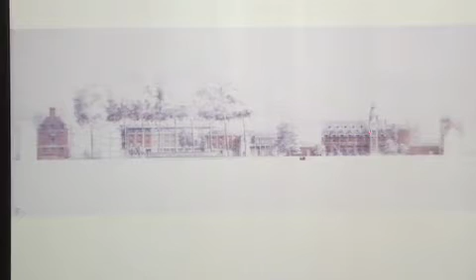So this is just one of the drawings from that master plan, which is a crayon drawing, and it shows a sort of length cut through the college. We're just beyond Wren's first building. So Christopher Wren built the chapel, and then we get a Waterhouse library, and Waterhouse wanted to pull down Christopher Wren's building because he thought it wasn't terribly good, and he wanted to make the tallest kind of campanile in Cambridge. And then you've got Scott, and other architects working around the edge of the site. And the intervention here was one about height, 1, 2, 3, 4 stories there, a new master's lodge, principal's lodge. And the question was, is it brick or is it stone? I know that sounds...

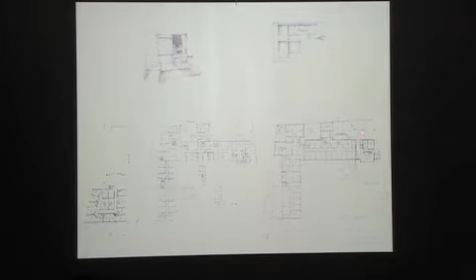This is the interior. Those are those wonderful plane trees you just saw in that image. So these were just the first drawings of a layout which showed sort of secondary courts. So we're sitting back between trees that had to be kept and creating smaller court spaces, and then a series of intimate spaces and the bigger space and so on. The point I make is, whilst beginning to formulate a configuration for a building, a complex building with lots of parts to it, at the same time one's thinking about materials.

And what I'd like to say is that, you know, the punt that you make as a designer at certain points, it's that intuition which is incredibly important for the project. And the planning is one thing, but the punt about a sense of what the materiality will be is the beginning of a long journey. It's like a novelist, I guess, sketching out a novel and then filling it out. So it's a very potent thing.

These were 2 little sketches. I'm sorry they're kind of quiet, but you know, what I wanted to do was, in each of these rooms, which are student rooms, to have 2 windows. And this is the first sketch of a stone manifestation of the 2 windows, where I wanted to make a big lintel of stone that spanned 3 meters, 3.3 meters or something like that. You get a big window and a small window. The small window has a kind of shutter in it. There's a bookcase, and then there's the big window that goes right to the floor to give light in.

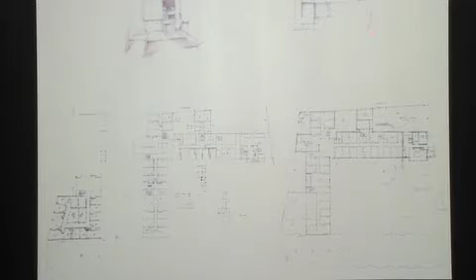And, you know, I'll come to describe this a bit more, but that sketch, actually, which shows the idea of a recess that would hold the 2 windows, becomes a journey in terms of making that is lengthy and very, very interesting. And it was the first time, actually, that I started a dialogue with Arups, who are our engineers, and a wonderful guy called Turlough O'Brien, who was their research guy on materials. And now they have a group called Arup Facade Engineers, and I've worked on most of my projects with those guys in terms of creating the detail, going through the specification, making sure that, you know, liabilities are covered, and so on and so forth.

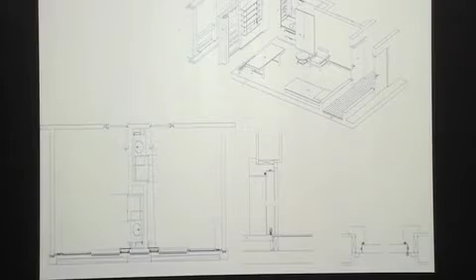But it is therefore a room, this is a typical student room, which has just got a nice big heavy door frame on the outside and no bead to the inside, in order that the bed can be this direction or the other direction. It sounds simple, but it's just to give that flexibility. It's an absolute dimensional kind of fix. You've got the big window and the small window. You've got layers. So you've got the stone on the outside, then you've got the interior with a place to bunch a curtain,

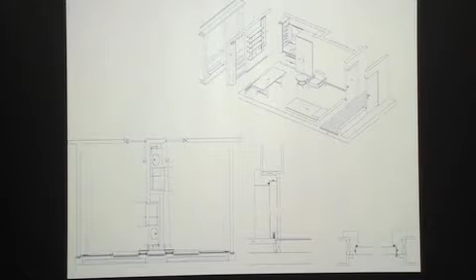which is actually in the position that water is, there's a downpipe here, so that water is pulled through the facade because there are secret gutters here. You can see that sort of strange diagonal. That's a fall on a metal gutter. And if I take you back to that building now, it's weathered very beautifully because of that detail. The secret gutter in the recess. So what was the recess in the sketch becomes a clear manifestation of a rhythm of thicker bits of wall and thinner bits of wall.

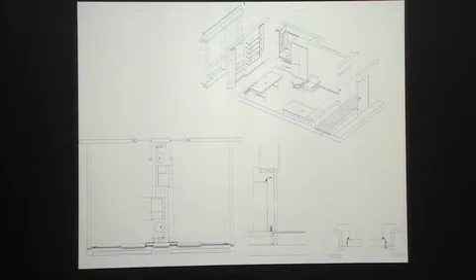The thicker bit takes a wash basin and clothes storage, and then reverses to the other side for a room. So you get a kind of back-to-back spine, thicker wall, recess, 3 meter or 3.3 meter, if I remember correctly, lintel, and back. So this is the detail for that planning of the big jamb, little architrave, you know, that allows that flexibility. There's the niche for the cleaning. There's a little wooden shutter that closes the little window and a curtain that closes the other one, and in the place that the curtain bunches is the downpipe that picks up that fall.

So that sounds, I know, a lot of detail, but this is then the configuration. Actually, some lines have got missed off here, but you can see the big lintel with an open joint there, which is just for movement, because if you get a 3.3 meter length of something, it's trying to move. The idea here was to make a self-supporting wall of stone. So it's not load-bearing, but it's self-supporting over 3 floors. So you have an external skin of stone. It's only 75 mil thick. That, in plan, has at the wider bits here a blockwork pier as well.

And the interesting thing is, when this is south-facing to the sun, the external skin of this moves about 15 millimeters compared to the interior, because the interior is very stable. You know, the exterior is going very cold, very warm. The movement in this and the joints and the size of the joints is all incredibly important. So this is the pressed gutter that happens at this point, and actually that is not typical as it happens. This is to the outside. So this is where we have a sill rather than a gutter that's picking it up. So, if I go back just very briefly, if this will work. Yeah, one more.

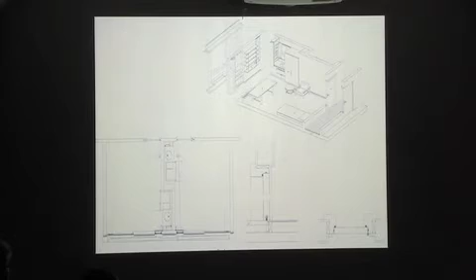There we go. Here you can see those gutters, and the stone is as clean today as it was when it was finished as a result of that. It actually all issues out over a harder stone at the ground, so they're picking up, you know, 1, 2, and then issuing over that point there.

I mean, there are bits of detailing I still go back to check, but that little pressing there, that in reality is slightly further forward, just allows the water to drip rather than stain the front. It's incredibly important for architecture, this idea of weathering. You may want the staining, you may not. Buildings change their entire appearance.

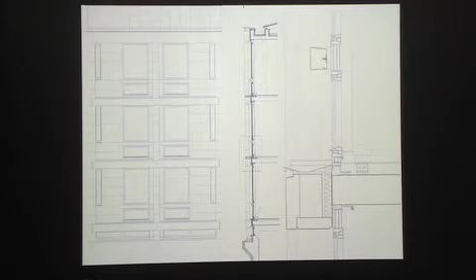It's amazing to look at St. Paul's Cathedral. Before it was cleaned, it was landscape, because the weathering bands are very horizontal. Suddenly it's clean, everything's vertical. Everything changes through weathering in terms of your perception of a building. So I know that's not the kind of thing that worries you at this stage, but it's really the stuff of practice. So there we are.

It gets to its most extraordinary when you have something like a sundial to deal with. It was an idea I had for this blank wall, which I really like, because they have a common room, they have a history of science, and this is like making the building speak. It sounds easy, but you need several people involved. You need a dialist, you need a carver, and you need the designer of the whole, as it were.

But this gnomon, which has that block on it, creates a shadow here, and these beautiful forms here are called the equation of time, because the Earth wobbles, and it's not as precise as a digital watch. It changes up to about 15 minutes, solar time to digital time, over the year. And it's a wonderful thing.

The dialist is part of the computer faculty, and they had there the first internet site. It's now kind of a sacred site, the coffee machine. The first site was a coffee machine in Cambridge, linked to America, so that the people in the faculty could see when the coffee was ready.

He used this dial as the basis of his first year undergraduate examinations. But he could have used them as questions for PhD students, because the understanding of the world and astrophysics is embedded in this.

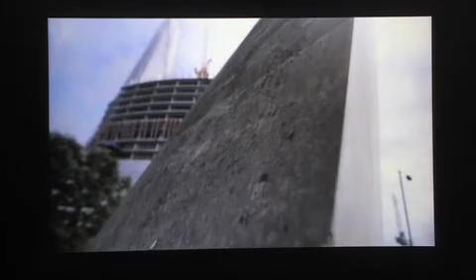If we didn't get the stone thing right, the water thing right, this thing could have failed. At times we thought, well, I hope this works. So I'm glad it has. This is a piece of work that touches historic time and the old bridge, but also the craftsmanship of today.

It's a line between the ground and the sky, between two territories, between the north and the south bank. It's trying to create something of a place. The needle is a particularly poignant example of how an architectural object can create a moment for and of reflection.

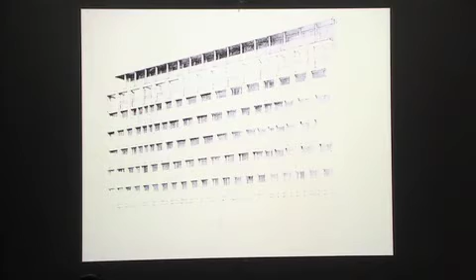Anyway, I'm sorry this is so washed out, but actually it's a fairly strong pencil drawing in its original form. I must do something about that. But this is a drawing pre-planning that just looked at this idea of an exoskeleton of stone. So a building that wouldn't have a steel frame, which it doesn't have. It's described by a good friend of mine as kind of being a high-tech Stone Age building. And there wasn't any precedent, so it was very difficult to do it, actually.

But it is load-bearing, and as the loads diminish as you go up, the separation of the stone gets greater until you get to this sort of loggia at the top, and the two setbacks then are a celebration rather than an apology for the top. And as you get to the bottom, you may see that these stones here are just slightly thicker. These are 400 millimeters thick by, you know, more or less 900 wide. And they go up to 600 at the base, just because of the loading. And this is with Whitby and Bird, Mark Whitby and co, and a man called Des Mayer.

So what you're seeing is that the loads are taken directly from the floors onto these horizontal beams and thence into the stone piers, which are all made off-site because you had to build these things quickly, these offices. This is just built for the same money as an ordinary office. So that's, I would emphasize. The reason it's load-bearing, and the interesting thing, this for me was a campaign about using stone properly rather than as kind of bathroom tiling, you know, which you see all over the place. And so we had to go through the process of designing it.

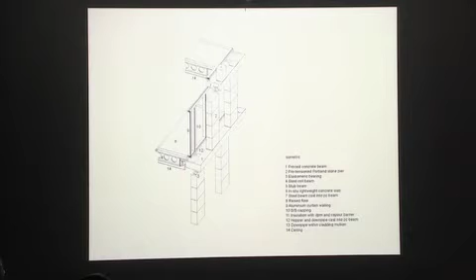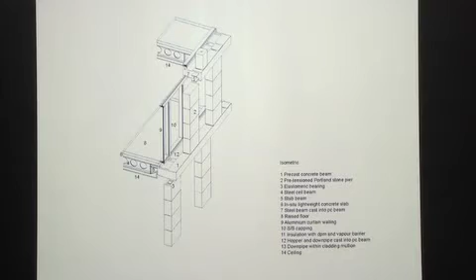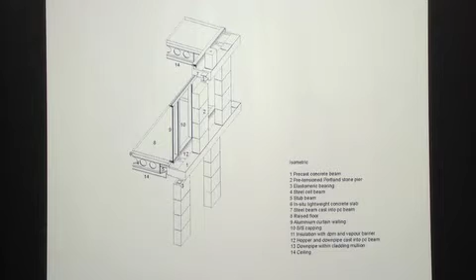So you have your pre-cambered beams spanning 16 meters, and they come to a connecting plate, which is like a shear plate, which is sticking out of the back of this horizontal element here. And that's picking up weathering, so learning from Pembroke. The precast then falls to outlets at every 6 meters, and they don't fall across a joint. And then you get to the tyranny of the grid, the office grid, which is all 1.5 meter centers behind that. So you're working from the lyricism of the front, which is composed and to do with moving into the entrance, from that grid that you have to work with.

So this is the outside of the building. There's an encapsulated horizontal beam going back to this stub, which then gets connected to the big beams. These are wonderful, hefty pieces. So the water falls back into this channel and then down a downpipe, and that downpipe is encapsulated in the facade, like the Pembroke facade. And the space between the back and the window and the pier gives you the depth.

So I said, okay, you know, they were trying to put the old building on steroids and sort of replicate it. And I said, right, I need 900 millimeters, don't touch that, and I'll give you the most efficient floor plate I can behind that, but that's not for negotiation. So you get the depth, so the stone is actually doing a solar shading job. From the inside of the office, you're looking to the back of the stone, which is very pleasant, so it's like a stoa.

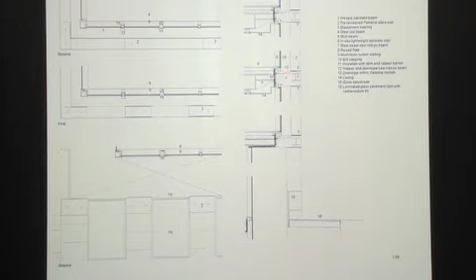And you have a curtain wall with a lot of glass in it. So here's the glass typically. Here are your stones. Learning from Southwark, with pre-tensioned blocks that come together with a bridge bearing joint at the bottom of each, because this thing flexes. So it's quite live. So those are the elements. This is down in Portland. Four stonemasons making up all the stone piers in literally four blocks, made to plus or minus 1 millimetre. So they're actually sawn and then they're shaved to this very precise dimension.

So I was wanting plus or minus 1 millimetre on this, and I have endless battles about joints and lengths of lintel and stuff like that, because it's everything. I mean, you've got to get the architecture right, but actually jointing is fantastically important in how you feel the building. Anyway, so this is the interior.

No steel framework. Just these stubs going into these monsters. You see, so these are at 3 metre centres. There is a beautiful casting of stooling to take. So there's a raised piece that's falling to take each of those stone piers.

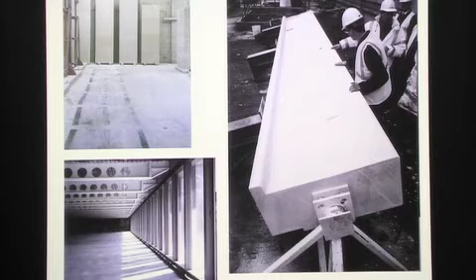Now, if you realise that every pier is in a slightly erratic place, you've got to realise the working drawings and the coordination to make this work when it hits site is very precise. It really takes a lot to get that together. Anyway, that gives you the beauty in my mind of these corners, which are open. You clean the windows, by the way, by walking on this space here, so you don't have a kind of gantry mucking around here.

And then at night, obviously, it has this wonderful skiagraphy. And during the day, it's like a kind of a dial in itself, because you get those extraordinary shadows that I showed you on the back of the building to the street, which is much tighter. And that sort of civic space from the outside is because of that business of being on a square, being half a square, needing that kind of tectonic to have an authority.

On the back, it's really tight, and I love this. You see there's a kind of irrationality here with the way in which the meeting styles gives you the planning grid for the office behind. So those are the 3 stone projects, and I want to move then to ceramic, and I have 3 projects. Won't take as long.

But it starts actually for me with this wall at Wimbledon School of Art. There's a new building. This was a space that was occupied with some sheds from the Festival of Britain, some of the site huts, and they were just falling to bits, and they needed new space, new studio space. It's a very nice brief: studio space, as flexible as possible, that can open up for a show at the end of the year.

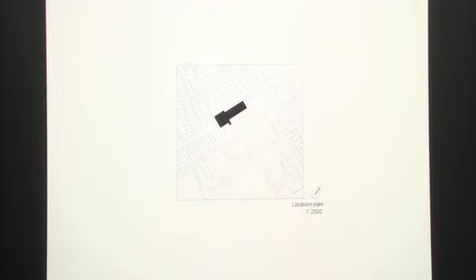Here's the site plan, very simply, the new building in black, set into this sort of suburban world. A terrible planning nightmare. In the end, it's kind of quite tight, but this is like with the AKT again. These are goalposts, right, that travel across the space, create a north light, to the underside of which you can hang divisions during the year, but otherwise it can be this sort of 60-metre long space.

And there's a theatre door that opens up so that this space can extend into the two-storey block, which looks like this. So this is the internal, acoustically separated, passively controlled sort of experimental space for installation work.

Anyway, so that was the first meeting with Shaws of Darwen, since when we've done quite a lot of work with them. So that's a sort of art for art, you know, the art project, glazing, ceramic, hard bricks, Dutch white bricks, and sort of sense of reflectivity to this little courtyard in the school.

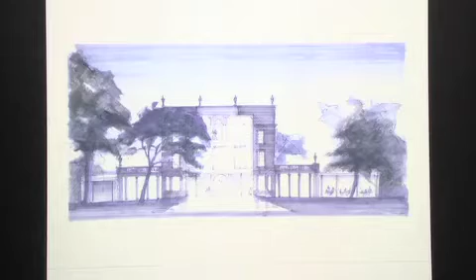And this was one of my competition sketches, which suggested lightness, levitation, something of that gauze again, reflection, a world between night and day. I had Magritte in my mind in some way, because this side is always in the shadow, as you perhaps see from that image. So this is the condition before. Reginald Blomfield had gutted it, and it had no temporary exhibition space, which was a real problem for a contemporary museum. It's the lifeblood. It had no cafe and so on.

So he stuck his stair here, and we had to move the stair across. It's a Grade 1 listed building in a UNESCO World Heritage Site, so it's quite sensitive. But the idea here was to re-engage that axis, to reconnect the building with the garden, placing a new lift here and a riser of services here, and try and create as little structure as possible, taking the structure off the corner to dematerialize it on the ground floor.

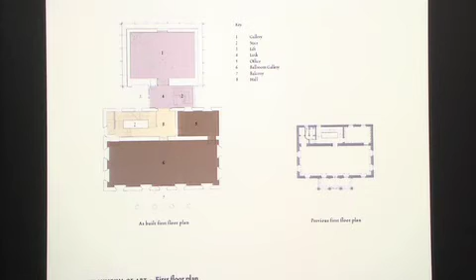Creating an education room, very importantly, and a shop and so on, but also an invigilation point. This has to be very low maintenance, so one person can effectively run most of the museum from this reception desk. So we go to the first floor, this great ballroom which we unjammed. It was full of sarcophagi with a riot of little things that you couldn't really make sense of.

And then to create, in the height of that ballroom, 2 floors here. So the idea was very low ceilings to put in what was essentially a domestic collection of Holburne's into this precious casket behind a glass and ceramic skin. So ceramic here, and then glass on the outside with these fins that stabilize the glass. Then on the upper level, the mezzanine, you had a little staircase that took you up, and then you get views into the garden, very importantly.

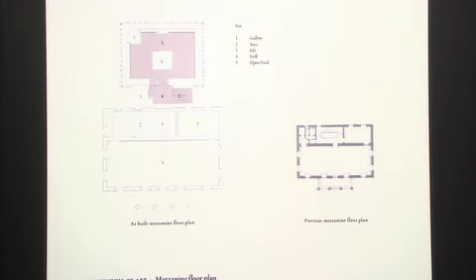And there's this magical moment here where you're at the top of the stair and you look into the gardens one way and you look down this wonderful street the other. So it's like a focal point. And then the top floor, coming further out, it cantilevers out, creates the exhibition space, which is top lit. So it's like a picture gallery. This is top lit, beautifully lit by these 3 oculi here. That's the way to see pictures, with top light, or sculpture. So it's these 2 top lit spaces, and you can now transfer paintings from here to there.

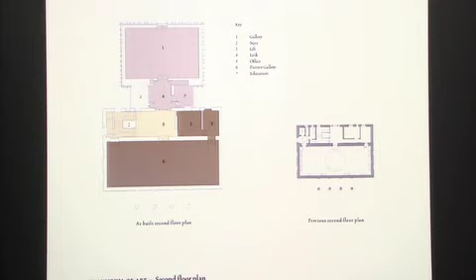This is then a ceramic wall. So I had the problem, which wasn't evident in that sketch at the beginning, to put the heaviest bit of the building on top. So this is my first sketch of an idea of a ceramic wall and glass. And I wanted the reciprocity between ceramic and glass, the crafted surface and the reflected surface, which seemed to me to work. So it's not insubstantial, totally transparent, but I didn't want the grid to exist too strongly here, like this conversation with Finsbury Square.

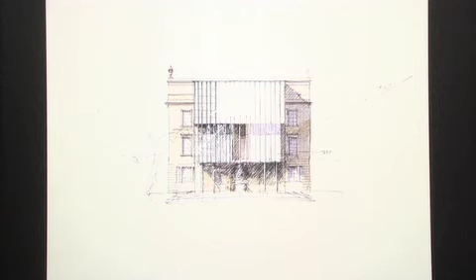So there's a regular line going through for tile heights, and then the vertical joint is hidden in the vertical element, which is a fin that goes through to pick up glazing, and then glazing with ceramic behind and a grid, and then glass and glass. So it's like a triple glaze system. So these are early sketches of the Janus-headed kind of quality, the town and the garden side,

with the total transparency. It's exactly the opposite. You've got total transparency here, and it gets heavier, whereas this starts with an urn and ends up with rustication. For me, I couldn't fly stone around this building unless it was a very exotic stone or something. That's terribly meek, I'm afraid. It just doesn't work for me. Stone picks up load as it gets to the ground. It's a very important quality of the material.

So anyway, here's the basic section. The opening here, cafe here, archive below, ballroom, 2 heights for the intimate collection, the new temporary exhibition here, the permanent exhibition there. So from a curatorial perspective, you get the coming and going across here.

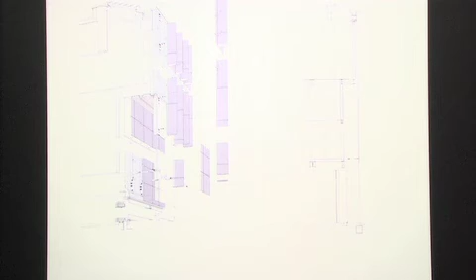And this is how that section works, with the ceramic fins backed and held by a stainless steel element, which is the real structure, pinned back to the ceramic interior here, because that's like a sheet of glass that goes a long, long way. This is like 5 meters, this is 4, so it's like 9 meters.

So here it is, as built, with that openness. You're looking right through several layers of glass. So it's low iron glass. Then you get the outer layer of glass and the ceramic behind it, and then the ceramic on the outside, and therefore the shadowing and so on. And actually, photographs don't do it justice, because it's always animated by movement of the leaves, for instance. You get these very beautiful shadows off the glazes.

And this is the connection where I just dropped natural light. This is the old Blomfield window cut. It's a wonderful collection of Gainsboroughs and other paintings in the permanent, and then there's a contemporary space on the back side. So that's the building.

This is the refurbished top gallery. From an environmental point of view, you're getting absolutely passive control on the ground, then a bit more control on the first floor, and then very tight control here. So there's a slot, a return air there, and these ducts cut into the existing plaster deliver tempered air into this space.

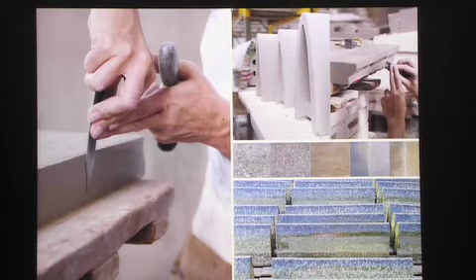This whole project was £7 million. So £3.5 million on the existing building, 3.5 more or less on the new building. So very, very tight budget. And this is the process, Shaws of Darwen, just finishing off. These are cast rather than extruded. So there's that kind of hand tooling, and then the glazing, which is two layers of glaze, single fired. It's a very crafted product. It's not an art product.

And the last project, which I'll go through quite quickly and it will be revealed soon, is where I wanted to use, because of its location, a much more artificial idea of using ceramic, much more something that was to do with polychromy. It had the art project in it and so on. So this is where we are. You can see that I call this kind of urban dentistry in a way, because this was a bunch of shot buildings, to be fair to them, and a hole in the center with lots of staircases that you couldn't get up with, no lifts, and really, really difficult.

It's the first of the Crown Estate's. Their leases, you know, Regent Street has been done over the last 10 years because the leases in Regent Street were 99 years long. When they came in, they were able to do the refurbishment of Regent Street. They're now starting their estate in St James, and this is the first one, so hence the name, the St James Gateway project. So this is where it was.

Blomfield again. God, he's here. He gets everywhere. I mean, Norman Shaw, Blomfield at one end. These guys had an idea of urban blocks, and they thought Piccadilly was going to be like the Rue de Rivoli, effectively. So if you go to the Ritz, it has that colonnade. It's exactly what was in mind. You have a cornice height that they set, and then it suddenly drops because you get three buildings that were part of the 19th century.

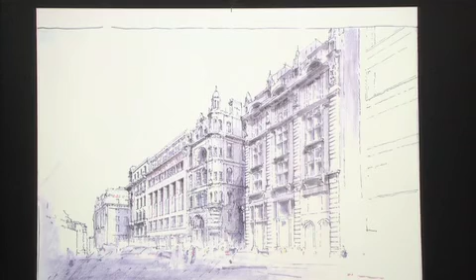So this is where it was, and this was my first sketch of what I was trying to do, which was to register that cornice. Even at this stage, I knew I wanted an art project on the cornice. There's a kind of red that you can just see in these. So there's a double order which responds to the double order of Shaw and Blomfield and others. There's a lower level here above the retail, and you can just see that these lines run through. So there's a kind of floor level.

I went through the process, I put together a list of artists that I thought would be great polychromists, including Cy Twombly, who's since died and said he was too busy. I then enlisted the help of two great art critics, Richard Cork and Paul Moorhouse, and we interviewed, on behalf of the Crown, the artists and chose Richard Deacon. And to cut a long story short, he came up with this sort of extraordinary idea, because he's been working on this sort of sense of folded elements.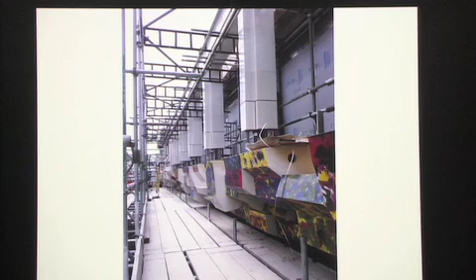It's a 30 mil wall of ceramic. Not as big as the Holborn actually. And it's set by stonemasons, so it's not like a rain screen. It's lime mortared, and we'll see what it looks like. But this is it coming on. These are left out actually, so we can put a little weathering that goes across these. So 39 pieces of a series of sections, and then he did colourways.

So he painted these colourways, and we had a fantastic time working with transfers between the kilns in Staffordshire, where these are made. So each of these is a transfer, like if you were into modelling and you had decals on plastic aeroplanes, you put them on with water and then brush them down. Exactly the same technique is used in ceramics, but it's kind of died out, as you know, the tragedy of Wedgwood and the Staffordshire industry. So we resurrected it. And some of these are quite sophisticated. They've got like 8 screens.

So you're putting a ceramic mix, which is then fired onto the ceramic. The ceramic elements are fired at 1200 degrees or thereabouts, and that means that they're completely water resistant. And then at a lower temperature, about 850, there's a second firing, which means that the transfer medium burns away, and the ceramic glaze is absorbed into the surface. So it's really bonded in, as a glaze.

So that is the cornice going in. These are the sort of details, these are beautiful sill pieces. The great thing about this is that you have 6 bays, so you get a lot of complexity in the section, but because there are 6 of them, you repeat. So there's a very interesting way in which ceramic is different to stone and stone cutting. So yeah, that's more or less it.